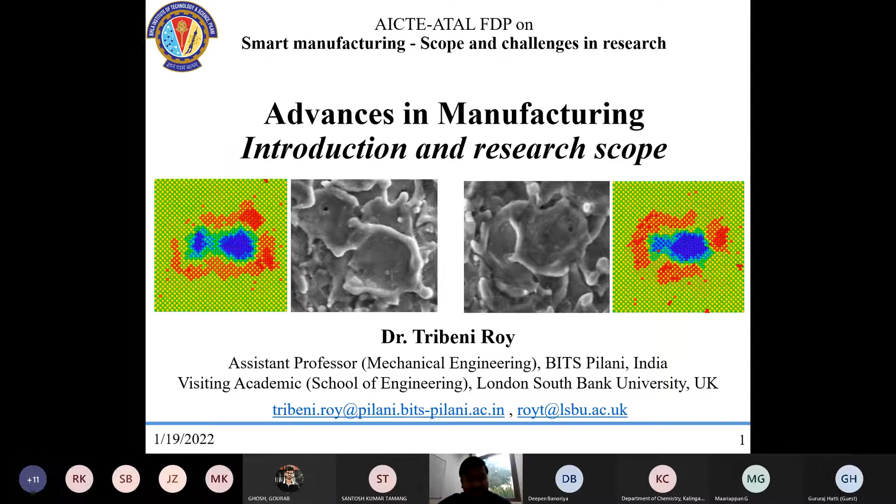Now moving on to today's first topic, that is advances in manufacturing. So my talk overview would be a basic introduction about this, then the evolution of advanced machining processes, though I would not go deep into each and every process, just an overview, and then micro nano machining, again in very brief, so that we do not spend much time on whatever is already available in the literature.

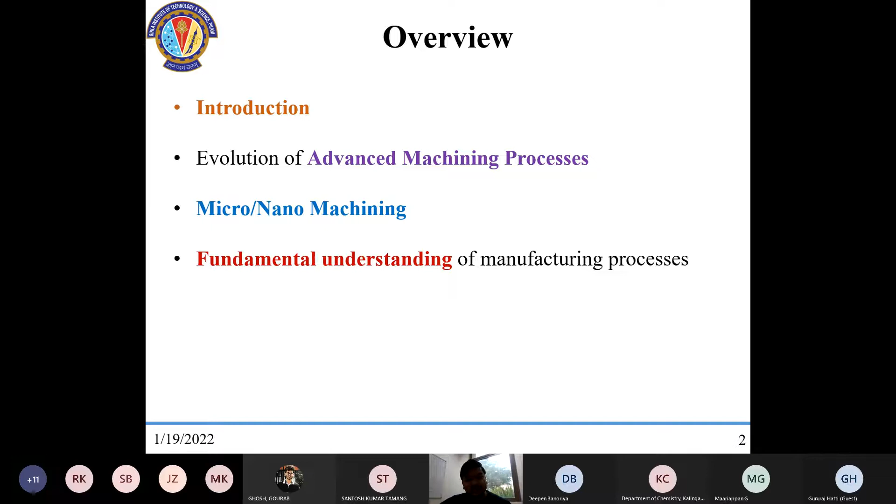Then something I want to introduce, so that if I'm talking about what are the research scopes currently in manufacturing, understanding the basics of the evolving manufacturing processes, in particular material removal processes, why is it important and how can it help researchers who want to move or start their career in this area, what are the things they can expect.

Currently, one of the works that we have done using an open source molecular dynamics simulation is on nanopolishing, which I will give a very brief overview of, and some other areas our group also explores apart from manufacturing, what are the things we generally explore.

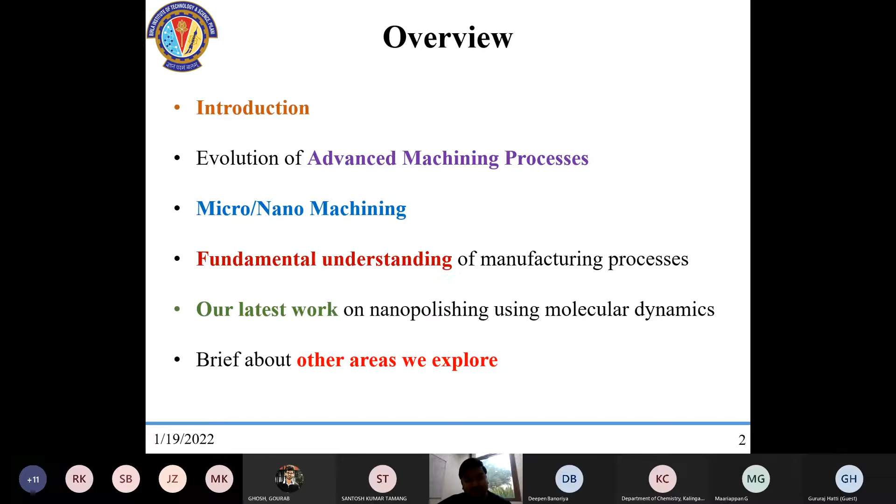Now, moving on, when I talk about advances in manufacturing, I want to know from the participants. If I say that my manufacturing advances, or advances in material removal processes keep on advancing, what is the final stage? When I say okay, I have done what is best in any material removal process, can anyone tell me what would be the minimum amount of material removal which we have control over? What can be the minimum amount of material that can be removed so that we can say we have reached the end point of manufacturing? Anyone from the audience?

So rapid prototyping, sir, or additive manufacturing? Additive manufacturing, okay, fine. So let me give you a basic idea of how material removal, material addition, and material forming and other stuff are different.

There is one particular area called top down process. When I say top down, I start with the raw material, I start removing material, and I end up with the final product. That is top down, which is material removal. When I say bottom up, I start doing a layer by layer deposition, starting from bottom and reaching the entire product. So that is bottom up, where rapid prototyping, 3D printing, additive manufacturing fall. Apart from that, you have physical vapor deposition, chemical vapor deposition, and a lot of other stuff.

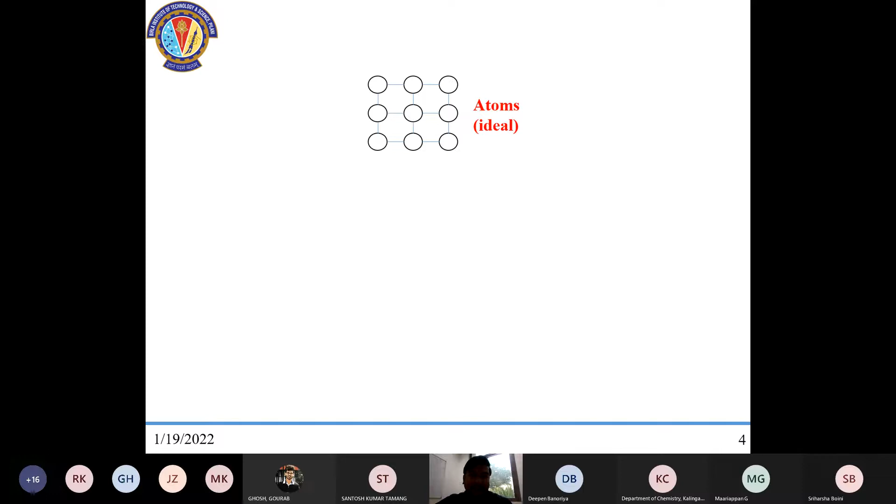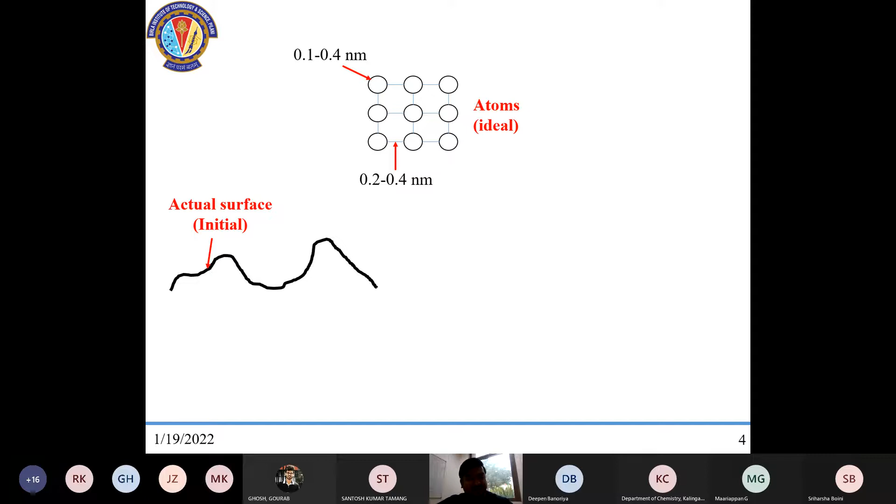This is just showing the dimensions of an atom and the distance between atoms and the average dimension. This is an ideal case. Your actual surface would always be like this, you have some waviness, you have some roughness. These are very basic terminologies we generally study. Now this surface may look like this.

Our goal in the material removal process is to make sure that whatever the requirement from the designer is — say for example manufacturing a 40mm shaft — we need to manufacture it to 40mm, but depending on the type of machining process you are utilizing, you may have some variation, which we call tolerance, generally provided as 40 plus minus 0.3 millimeter. Now, as you keep moving down, removing lower amounts of material, you are having much more control. Now, let me just open up the pointer.

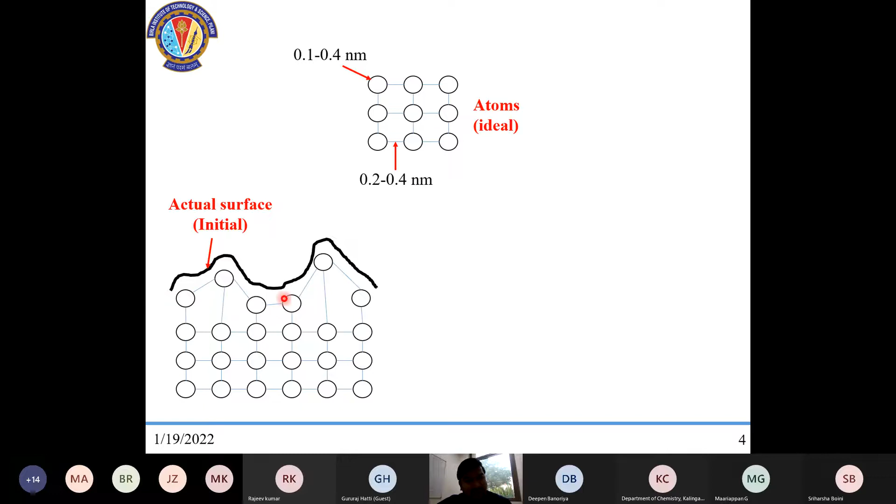If you look at it, say for example I want a very smooth, atomically flat surface. What I need to do is remove this atom, and these 4-5 atoms, such that I am getting an atomically flat surface. So if you have control, or you are developing a process where you have control on the number of atoms you are removing for each cutting or each pass, you are able to generate an atomically flat surface.

This is something which we can call ideal. It may be difficult in the long run to remove only a single atom. However, if we can remove clusters of atoms at locations which we require, that is also very close to ideal. So that is what advances in manufacturing, or particularly material removal, is all about.

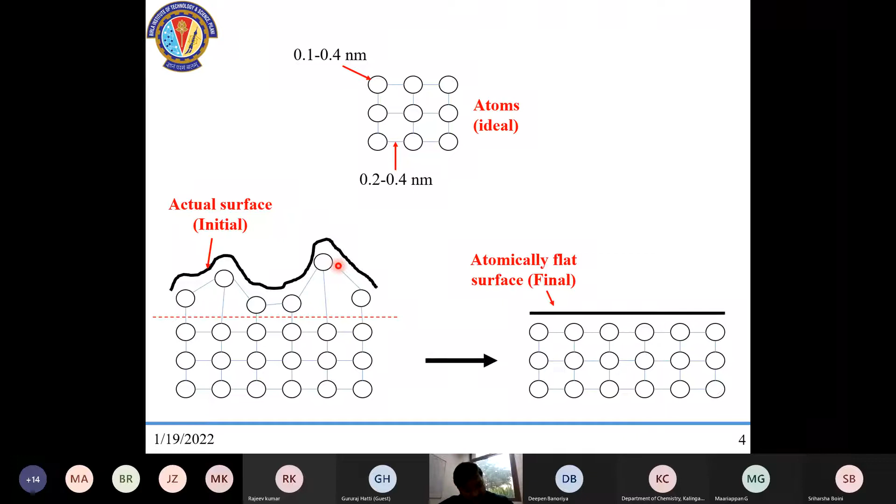Now this is just a simple example of how far manufacturing has progressed. We are still evolving. It's not that we have reached a point and there is something where we are stopping here. No, we are still moving ahead.

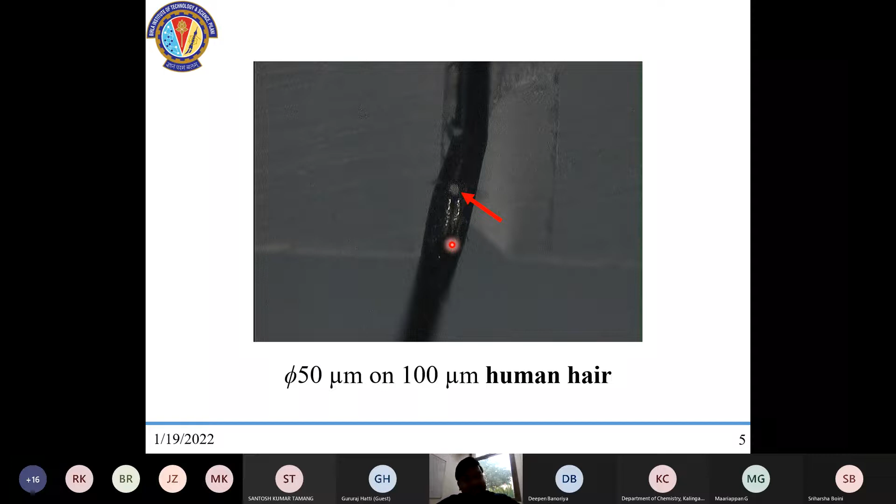Then this is an SS wafer, stainless steel wafer, and you can see it's formed a mirror image. This has been done using something called nano finishing or nano polishing process. There are multiple processes available. So you can clearly see that it is more like a metallic mirror, where you can see the image very clearly. So it's not a normal mirror, it's a metal polished or alloy polished surface, which gives a very high surface finish so that a mirror image of any object is possible.

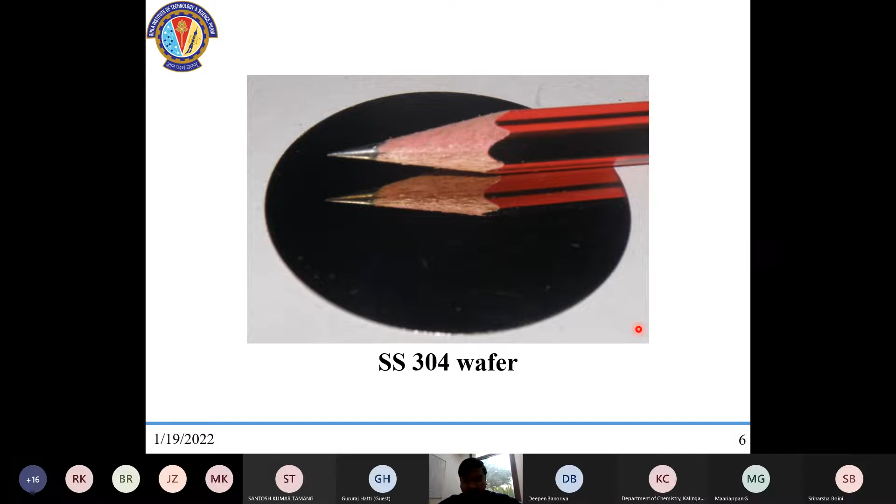So this is polishing. Next one, if you look at it, you see it resembles a tool post. It has a cutting tool, but the machined surface is like a mirror. If you talk about a turning operation or a facing operation, getting this sort of mirror finish on a metal or an alloy is next to impossible.

Now, looking at it, it still resembles a conventional lathe. However, there has been a lot of R&D going into it, and it has become something called ultra precision machining process. The cutting tool is not the conventional one, it is a single crystal diamond. Diamond, as we know, is one of the hardest materials known. Based on this concept, the workpiece can achieve an atomically flat or very high surface finish, close to 10 nanometers. So this is another area where progression has been made from conventional lathe to something called ultra precision diamond turning.

Probably one of the previous speakers, Dr. Rohit, is mostly involved in this. Now these are some of the areas where manufacturing advances has moved into.

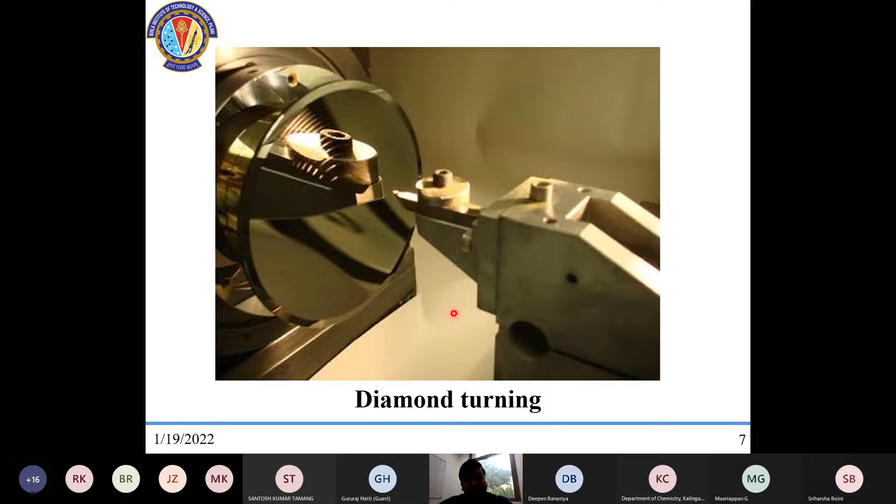Now the question is, why do we need to do this? Until and unless there is a need for certain things to be done, we don't require this. Now there have been a lot of applications based on which these sort of advances are being done.

For example, if you look at your cell phones, the one that we were using 5 years back and the one that we are using now, the amount of memory, the amount of capacity, and the amount of functionality it has produced, and the miniaturization that has gone into it. That means all the components, the chips, everything is getting smaller day by day. This is only because manufacturing has advanced to such an extreme level.

Apart from that, I'm just showing some basic day-to-day examples where manufacturing plays a key role. For example, this pavement, your shoes, this pen, they all have some sort of manufacturing excellence due to which we are able to use them in our day-to-day life.

Now, not only day-to-day life, there are also some advanced applications such as super hydrophobic surfaces. Imagine there is high rainfall in your area and you're driving your car. Now suddenly your wiper is not working. So if your glasses are super hydrophobic, indicating that whatever droplet or rainfall is falling onto it gets repelled automatically.

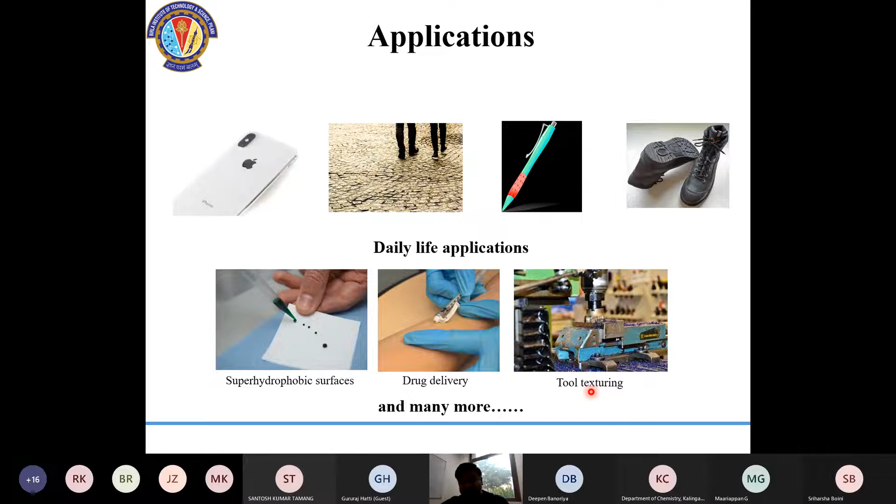Now, evolution of advanced machining processes. What I've explained mostly in the introduction is how it has evolved, and I've said it's because of applications. Now the question is, was it required? Can't we do this with the conventional processes that we have?

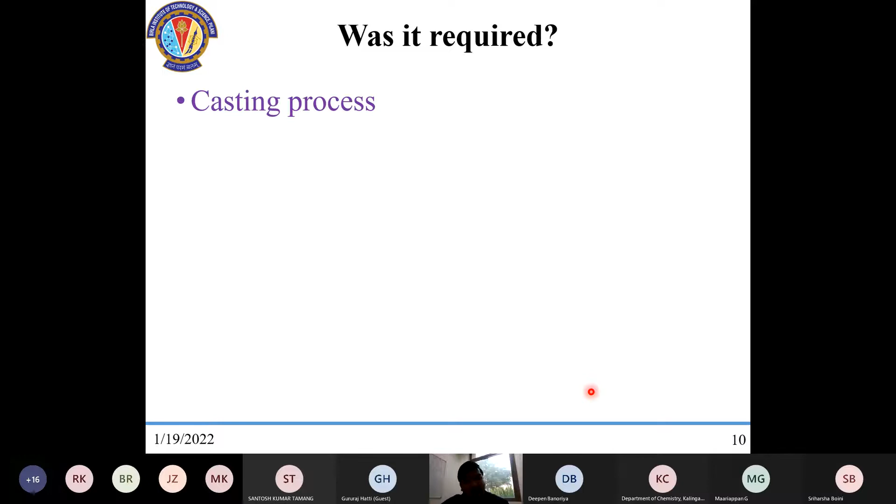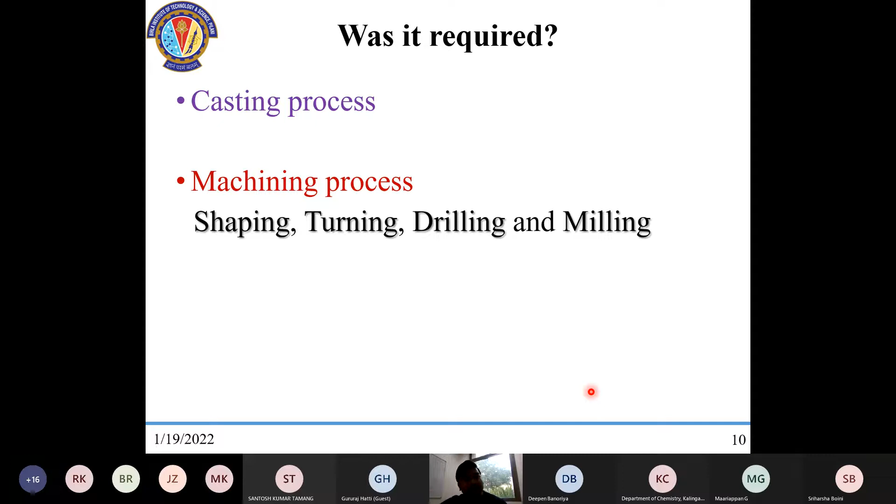Like, we already have a casting process, which is conventionally used across all large scale production. A machining process where we remove material and get the desired shape and size based on shaping, turning, drilling and milling, which we generally have in all workshops across the world. We have a forming process and a welding process. So the question is, isn't this enough, that we need to go for advanced machining processes? What were the limitations based on which we had to adopt alternate forms of processes different from whatever is shown in this slide?

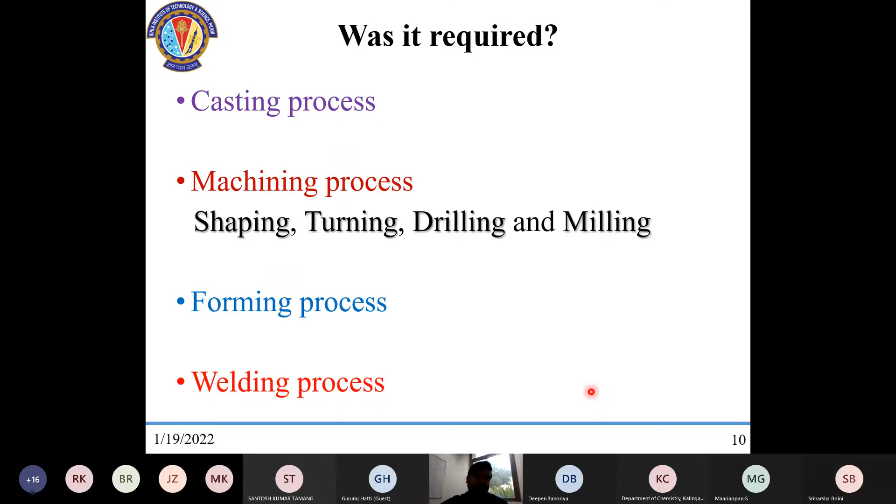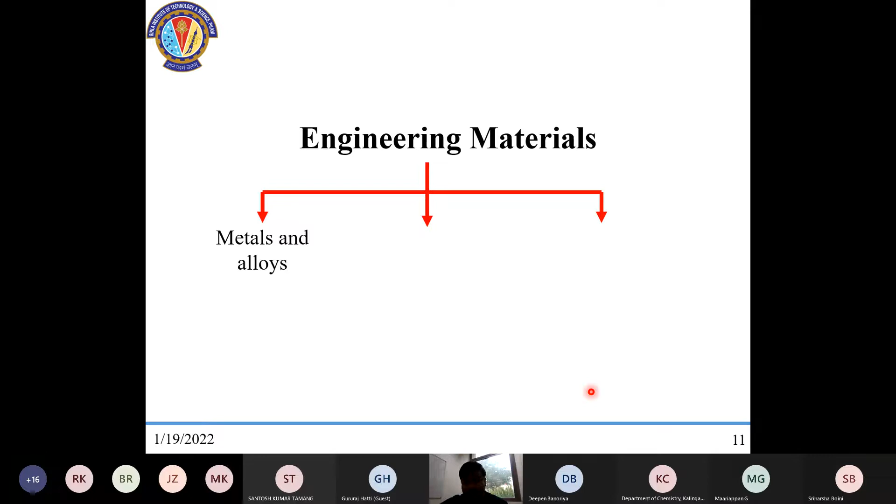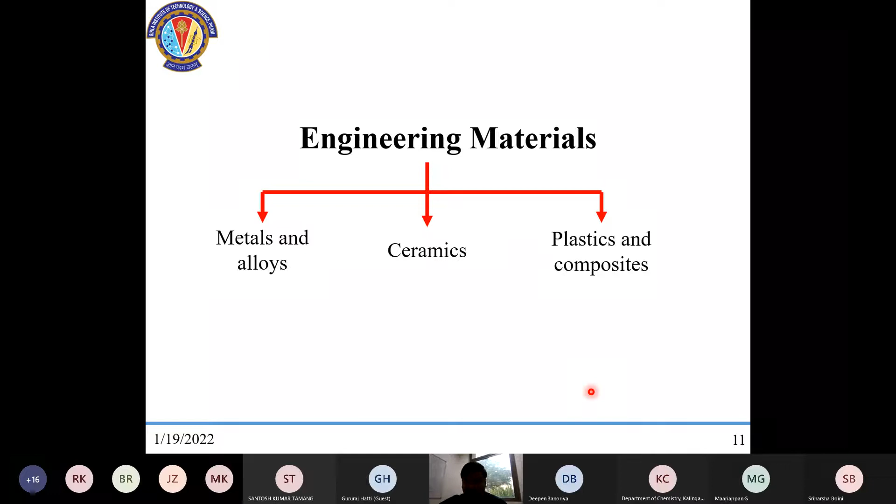Now comes the type of engineering materials. I've given very shortly three verticals: metals and alloys, ceramics, plastics and composites - and there are many others. You have metal matrix composites, and recently the evolution of high entropy alloys. So a lot of materials become difficult based on the type of properties they have. Using conventional machining processes for cutting or removing material becomes difficult because of the superior properties of this newly growing area of material science.

Now, always remember, it's not only the machining process that is being evolved. Day in, day out, a large number of materials are also being fabricated in the lab or going into commercial production. Shaping those newer materials for particular applications is equally important - that's one area where material science researchers are currently working. Once the material is proven, we need to make sure how we can shape it for use in a particular application.

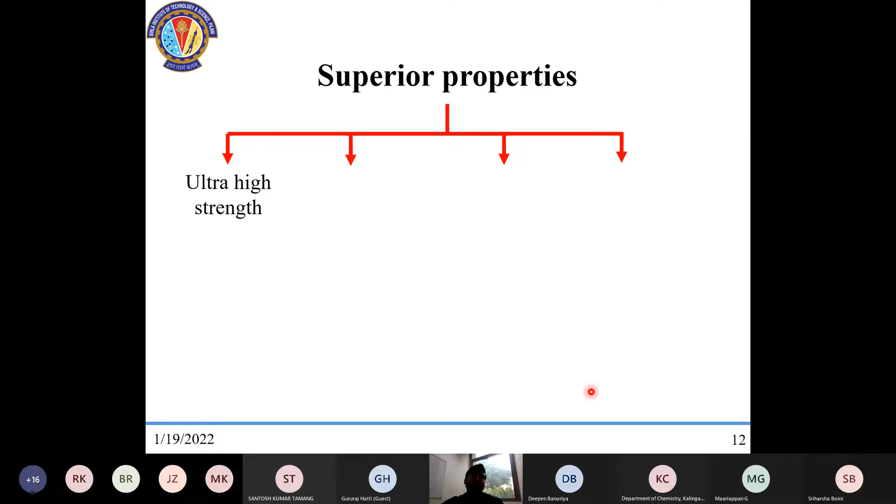Now, I have divided this into 4 verticals. Ultra high strength - if you look at some recently developed materials, one key area would be ultra high strength, high hardness, very difficult to scratch, high temperature resistance, and difficult to machine materials. Now, one key factor of conventional machining process - for example, turning operation - is the hardness difference between a cutting tool and the workpiece.

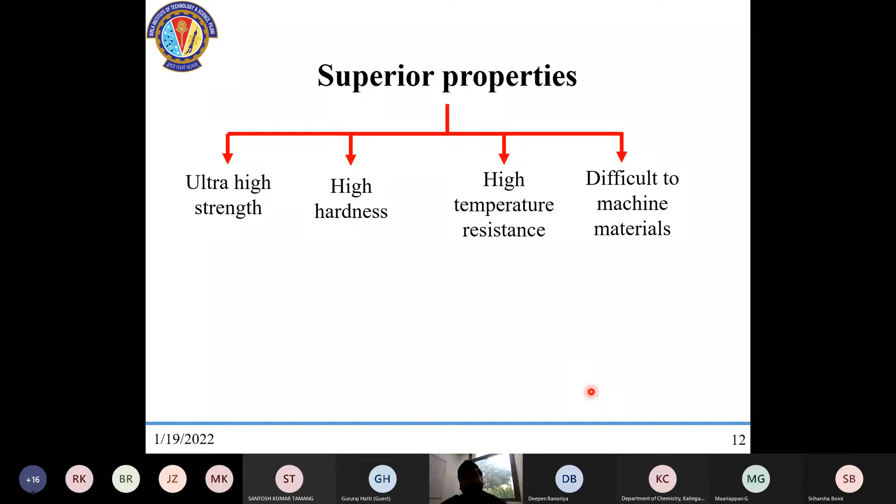If you talk about copper or aluminium, it's very easy to machine using a simple turning operation. Now, once I start increasing the hardness of the workpiece, there is high tool wear - I think you all must agree to this. Once the workpiece material hardness starts increasing and becomes very close to or even more than the tool material hardness, machining becomes difficult and higher tool wear is possible.

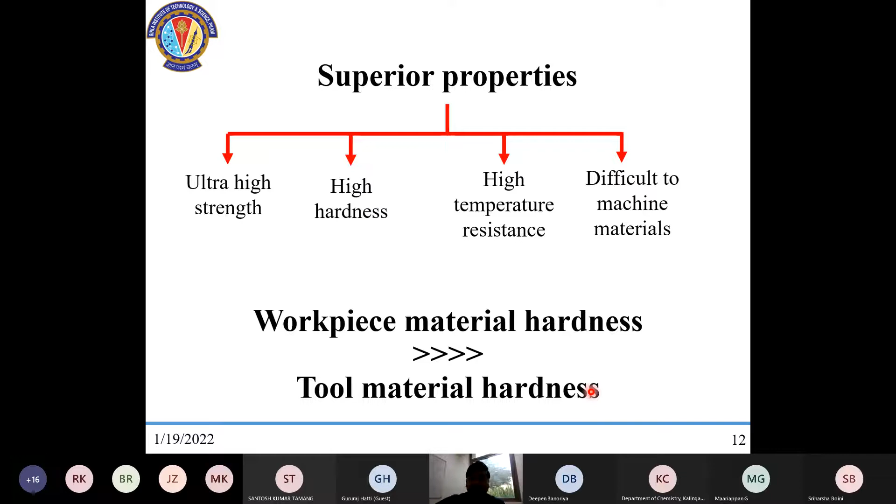So due to these reasons - superior properties of materials, the narrowing difference in hardness between workpiece and tool material, and certain other product requirements like complex shapes - it is not always possible to use conventional processes such as casting, forming, welding and machining to develop complex shapes as required by the designer. Machining in inaccessible areas is another issue - mostly using a cutting tool, and if using CNC to some extent, we have 4 axis or 5 axis milling, drilling, turning. Still, it becomes difficult sometimes to machine inaccessible areas with control over the amount of material to be removed.

Stringent tolerances: once production scales up and the number of defectives in an industry needs to reduce, as we move towards Six Sigma processes, defective items have to be minimized. Also, because the market is so competitive, tolerances have to be very stringent, meaning we cannot allow the deviation from the basic dimension to be very high. So being more accurate and precise with stringent tolerances becomes difficult using simple turning or milling operations.

The reason is the cutting tool has its own signatures, like the nose radius and other things. Now, if we do not control the amount of material removal, we are not able to manufacture goods with stringent tolerances in terms of accuracy and precision.

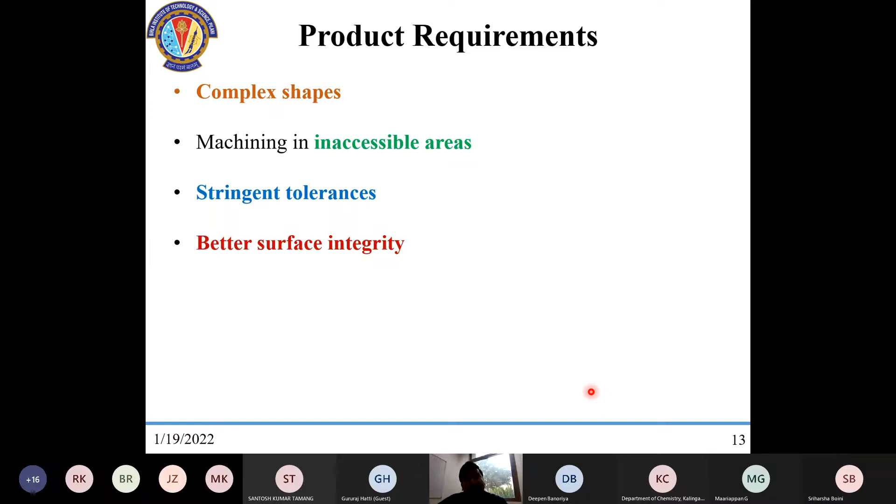Better surface integrity: even if we develop materials using a conventional process, we have to make sure there are no voids, cracks, or subsurface damages, and that it has better surface integrity, which becomes difficult using conventional processes. High surface finish: even when using conventional processes like welding for joining, we still need to add another post-processing operation to get a high surface finish.

The reason metal additive manufacturing research is still not attaining a proper level of acceptance is because with every metal 3D printing, we need post-processing to remove excess material or to get a better surface finish. Directly achieving a high surface finish using metal 3D printing may be quite difficult. So this is another area where, due to product requirements, it becomes difficult to adopt certain manufacturing processes.

High material removal and miniaturization: when I say miniaturization, I mean fabricating micro products, or having a large sample size but needing to create micro channels, micro dimples, or material removal in the micro range. When I say micro, I mean anything less than 1 millimeter, starting from 1 micrometer to 999 micrometers.

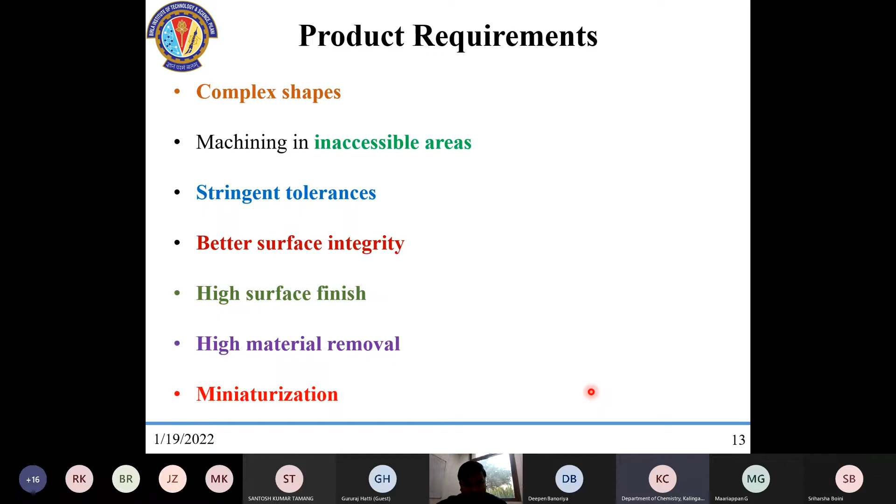Now, if I say I need to do nano machining or nano fabrication, chip removal or the amount of material removal should be less than 1 micrometer, so that it can be judged as nano machining or micro machining, depending on the chip removal and the type of product required. Based on all these things we've studied, we can say whether the evolution of advanced machining processes is required.

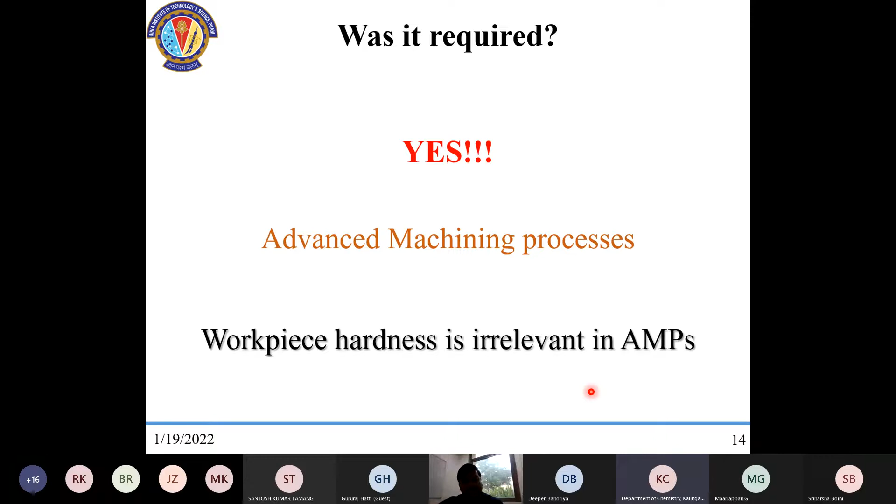Yes, it is required. In advanced machining processes, workpiece hardness is irrelevant. Irrespective of very high strength or high hardness material, advanced machining processes are able to machine to the required shape and size.

Now let us briefly discuss the different advanced machining processes. There are different classifications. If you go through textbooks, you can find innumerable ways in which AMPs are classified. However, I would simply state them based on the different types of energies used, so that we can classify them.

First is mechanical, which is basically abrasion or erosion type material removal, using abrasive or any type of energy which removes material by erosion or abrasion. Second is thermoelectric, mostly by melting and vaporization, also sometimes called ablation. Third is chemical, mostly by etching—on a surface, if a particular acid or liquid reacts with the material to remove or dissolve it, that is called etching.

Under these three verticals, for mechanical, we have abrasive jet machining, where a stream of abrasives is used. Abrasives can take many forms—diamond abrasives, alumina, or various others. Using that abrasive jet, you can machine high strength material. Now, as I discuss AMPs, these processes will also have advantages over conventional processes, as well as some limitations.

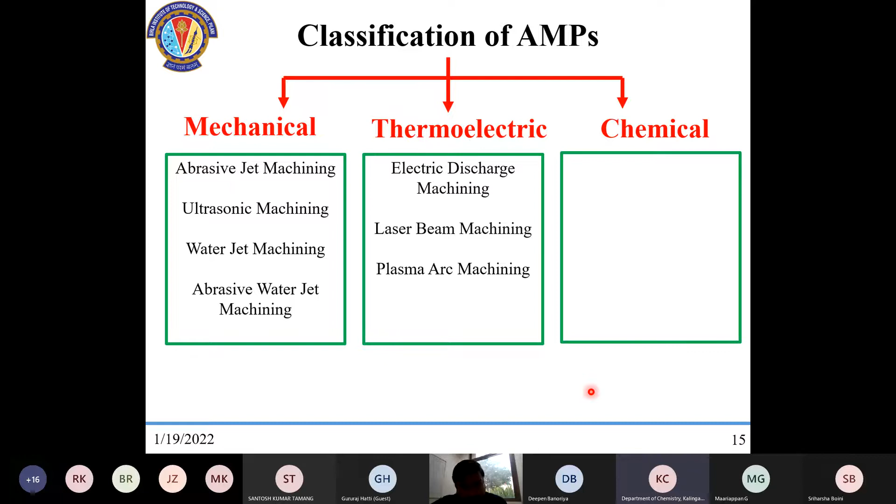Plasma arc machining, electron beam machining - these are high-end machining processes. The cost of developing the setup for electron beam would be very, very high, so these are available in very select institutes only.

Now moving on to the chemical classification of AMPs, you have chemical machining, directly etching, and electrochemical machining. Electrochemical means based on some electric field, you initiate some sort of etching or dissolution so that material is removed. Obviously, as I said, all these processes have their merits and advantages, but also have some limitations.

So simultaneously, when these AMPs were being developed, there was also a field where people started taking advantage of two or more of these processes, coming up with something called a hybrid machining process.

For example, abrasive water jet is a mixture of abrasive and water jet, which becomes a hybrid taking advantage of water jet, where no heat affected zone is there, and abrasive, where you can have material removal. So this can have higher material removal without any heat affected zone.

Again, EDM and ECM mixture - people are also using something called ECDM, electrochemical discharge machining, taking the advantages of EDM and ECM to make a new hybrid machining. So there are multiple hybrid systems being developed.

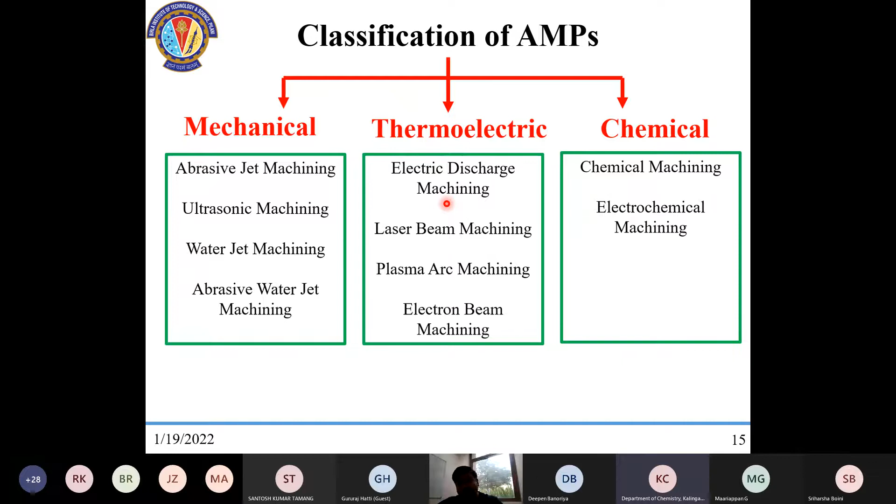Now I will not go deep into it. After this, I would move straight to what is called miniaturization or micro-nano machining. Whenever we say micro-nano machining, the difference between conventional macro and micro-nano is in the chip removal. Micro chip removal is mostly in dimensions of micrometers, somewhere between 1 micrometer to 999 micrometers. If I talk about nano machining, anything removed at a scale of less than 1 micrometer qualifies for nano machining.

Now what if I reduce the size of the tool and the workpiece and qualify it as micro machining, and then again reduce the size of the tool, workpiece, and entire setup and call it nano machining? I just want to know your opinion: does simply reducing the size of the components, tool, workpiece and other stuff from macro to micro to nano qualify as micro machining and nano machining? Anyone from the audience can speak up.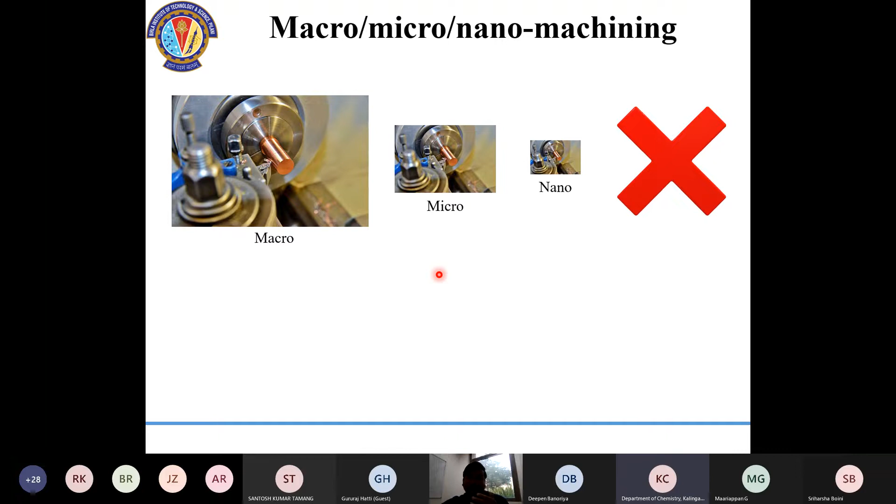Now what happens is, if you look at the grain structure, say I'm just showing two examples. Suppose, in a macro turning operation, this is the amount of material you are removing. So what happens? There are multiple grain boundaries, multiple grains involved, which does not take into account the individual defects or the strength of the individual grain.

So if you talk about individual grains, they are strong. However, when you take the grain boundaries and all other defects into the picture, this becomes much weaker. That is why when we are using conventional macro machining or macro turning, it is very easy, and the amount of stresses developed or the cutting forces, if you measure, those are very less as compared to the ideal stress or strength that is required.

So for ideal strength, you can find out the individual grain strength, and then dividing it by the amount of force that is required, you can simply find out what is the amount of stress required. Now in micro machining, say we are removing fewer number of atoms.

Now what happens is, as you narrow down or reduce the amount of material to remove, this individual grain strength comes into the picture, and the amount of force that is required to remove this small amount of material becomes high.

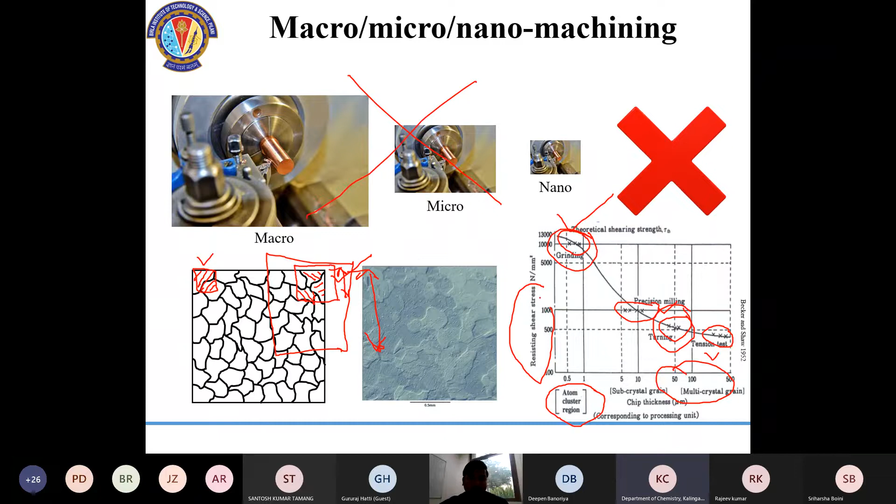So size effect is very important, and this particular thing I showed earlier is actually wrong - it all depends on the size effect. Hope this is clear to all.

Now, what I forgot to tell is that whatever advanced machining processes I explained, all of them can be converted into micro machining as well. For example, you have EDM, which is a very large machine that can remove a large amount of material. It can also come into the micro domain where you have micro EDM. Now researchers are also trying to get into nano EDM where the amount of material is very low.

Similarly, ECM has a micro ECM version. Laser has laser micro machining. Apart from that, ultrasonic machining has ultrasonic micro machining. So all the conventional advanced machining processes I have explained are also available or being developed into their own micro machining category. So it's not just that we do advanced machining, we're also doing advanced machining in the area of micro machining.

Now this particular slide, I wanted to show you the different capabilities. When I started this, someone gave a topic of rapid prototyping, and I talked about top-down and bottom-up approaches. If you look at this on the left, these are all micro machined, with dimensions in micrometers. If you look at this scale, it's somewhere around 100 micrometers, so this dimension would be somewhere around 30 or 40. All these small holes are maybe 30 or 40 micrometers.

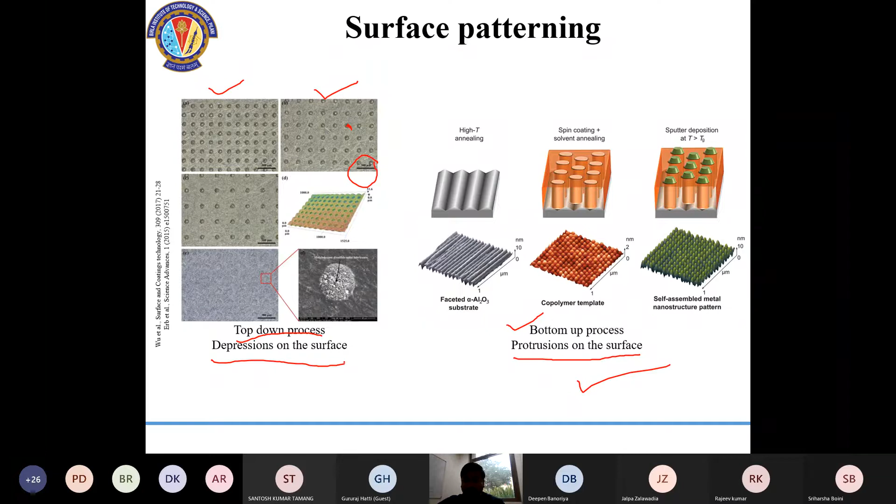Now I would like to move on to the fundamental understanding. As I have simply explained the size effect, if you remove a lower amount of material, you have to use a higher amount of cutting forces.

The reason is lower number of defects. Now, these particular things, say you have a single crystal or a polycrystal. Generally we use polycrystals. Polycrystalline materials have BCC, FCC, HCP structures. What happens to those if you're going for nano or micro machining - is it through normal abrasion? What happens to the grain structure?

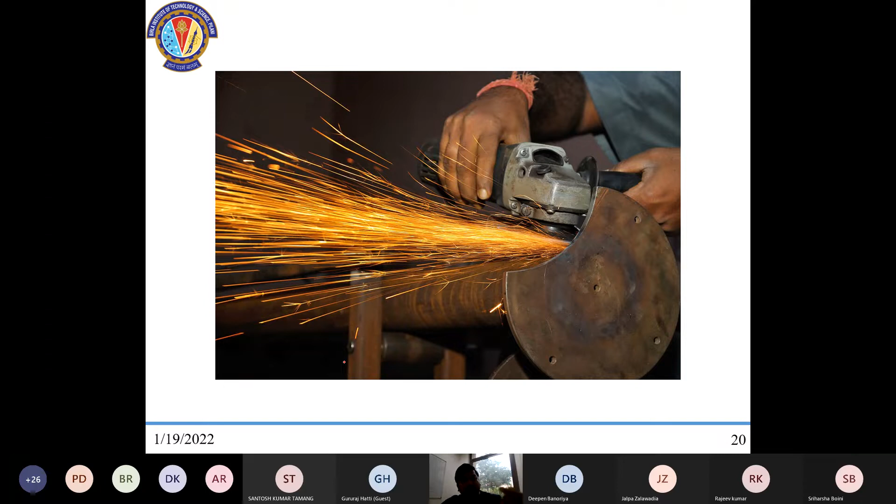For example, in a simple grinding operation, you know that abrasives are removing material. But what happens - do the abrasives dislodge material, or do they cause adhesive wear? These examples are taken from some literature. If you look at it, these abrasives first create a small indent, and then they start removing material in the form of chip. So this is what we know about grinding or any abrasive-based material removal process.

Similarly here, which is a more advanced finishing process, I have taken this from literature. Now what it does is you have an axial force, a radial force, but we don't exactly know what happens to the material. If the material has multiple grains and we try to remove material using grinding or abrasive-based removal, what happens if the abrasive falls inside a grain, or between grain boundaries, or across multiple grains? Understanding those aspects is very important, because if you are not aware of what is happening in the material, you cannot develop your understanding and further improve the process.

Why understanding micro and nano machining is important is because once you understand the process, only then can you improve it. If you do not know the physics, how would you improve it? Simply putting in X and Y and doing hit and trial experimental trials is very difficult.

Always remember, as I said, cutting forces are high in micro and nano machining. Therefore, the energy used per amount of material removed is very high. So to remove unit material, you consume a higher amount of energy - it can be electrical energy or any form of energy, which incurs a cost. So simply doing hit and trial becomes meaningless if you are consuming such high energy. Once the physics is completely understood, then going for developing the process is highly recommended.

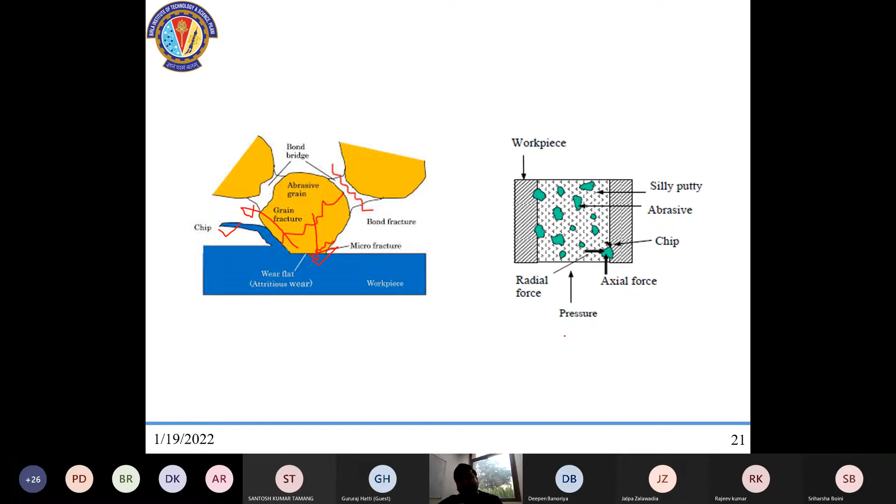Also, when doing research, it is very important that you understand the physics of what you are currently doing. With this, there is a separate area many researchers are moving into, called multi-scale modeling. Let me give a brief example. Most researchers use commercial software such as ANSYS, Abaqus, and COMSOL, which can optimize the process by simulation, giving you the cutting stresses, temperatures, and a lot of other data.

However, what it cannot do is show what happens in the material at such small scales. The reason is FEM particularly uses meshes which have a limited size. You cannot go beyond a particular size, and the material considered in FEM is a continuum - you cannot divide it into individual grains. So that is one of the demerits.

Now there is a scale at which this modeling phenomenon occurs. Across scales, the system size is in meters and the simulated period is in time scale. At the very left end, you see it is mostly at the angstrom level or nanometric level, where you use ab initio methods and quantum mechanics. This is mostly done by computational physicists and computational chemists, but since everything is now multidisciplinary and interdisciplinary, many researchers are also moving into this area. In ab initio, we use only a very few number of atoms to understand the very fundamental level of physics - valence bands and other things.

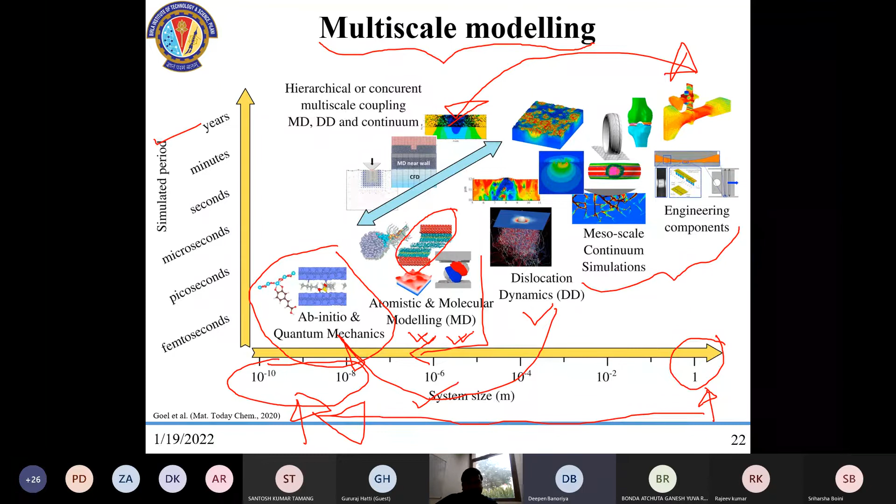Recently we were trying to understand nano polishing—in simple terms, if I have a material and an abrasive, how does the abrasive remove the material, and what happens to the grain structure? How is it distorted, is some amorphous structure generated, or if the structure is FCC, how does it differ?

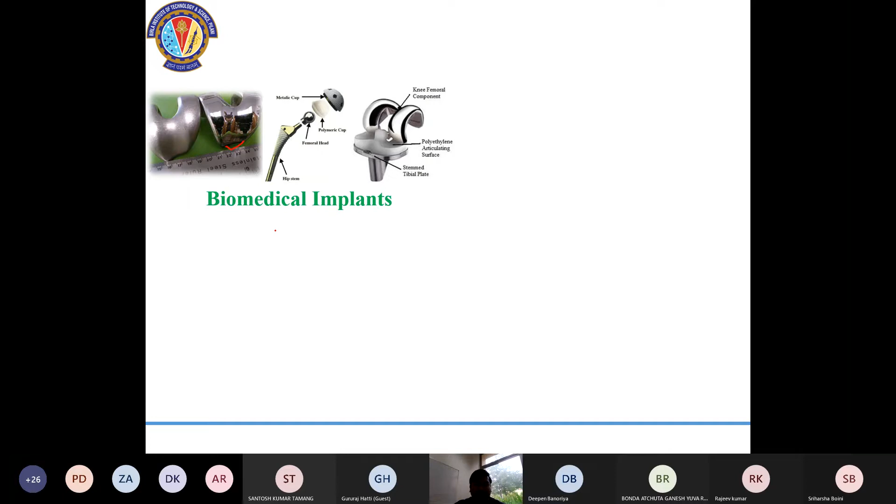Where is it used? If we don't have an application, there's no point doing it. If you look at biomedical implants, a high amount of surface finish or polished surface is required—because without it, when the surface rubs against another surface, the patient would feel discomfort. You also have high-speed rotational components, ball bearings, optical lenses and mirrors. So nanopolishing is a very important process in today's world, where very high precision as well as very high surface finish is required.

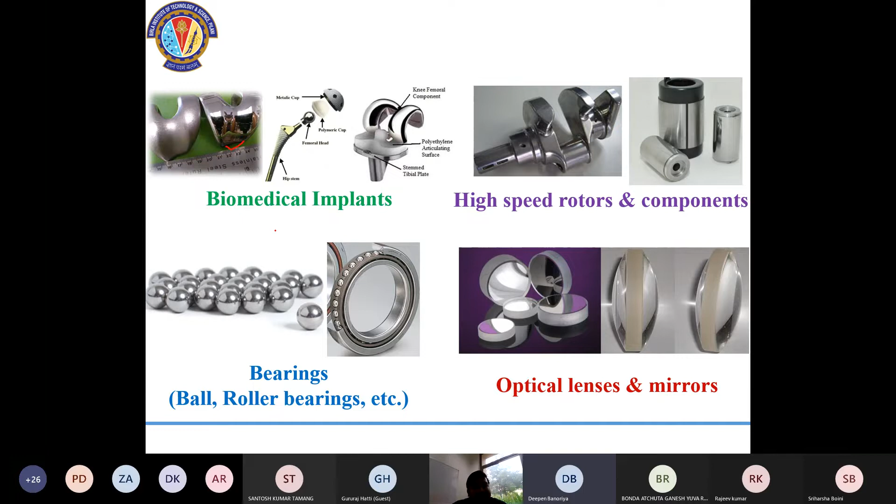To understand this, we started exploring MD simulations to understand how an abrasive and a particular polycrystalline material interact. The abrasive first does a small indent in the vertical downward direction, which is the depth of cut, and then it starts moving horizontally and removing some amount of material.

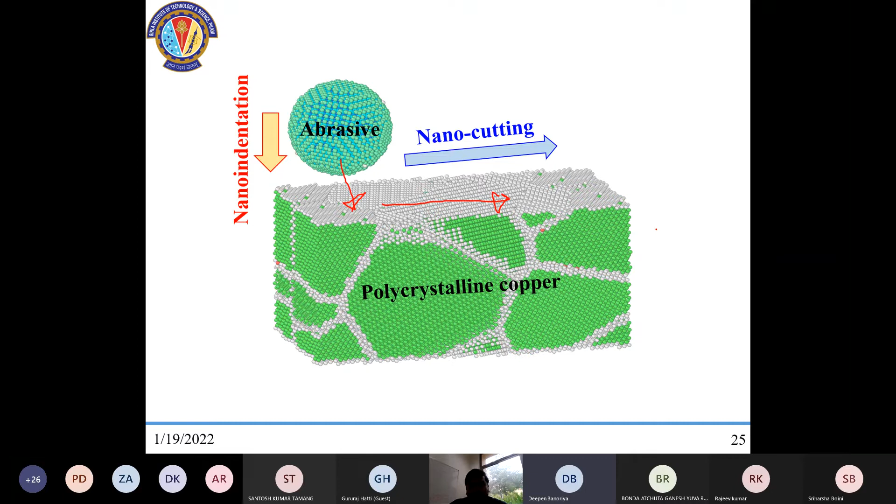Going deeper, the initial indentation was 10 angstrom, and the dimension was somewhere about 120 angstrom—that means 12 nanometer, maybe 12 or 15 nanometer, I don't remember exactly. This is the kind of scale where MD simulation operates; you cannot go much higher, because the computational cost and power increase substantially and it takes much longer to get results. So we do 10 angstrom depth of indentation—meaning the abrasive moves 10 angstrom downward.

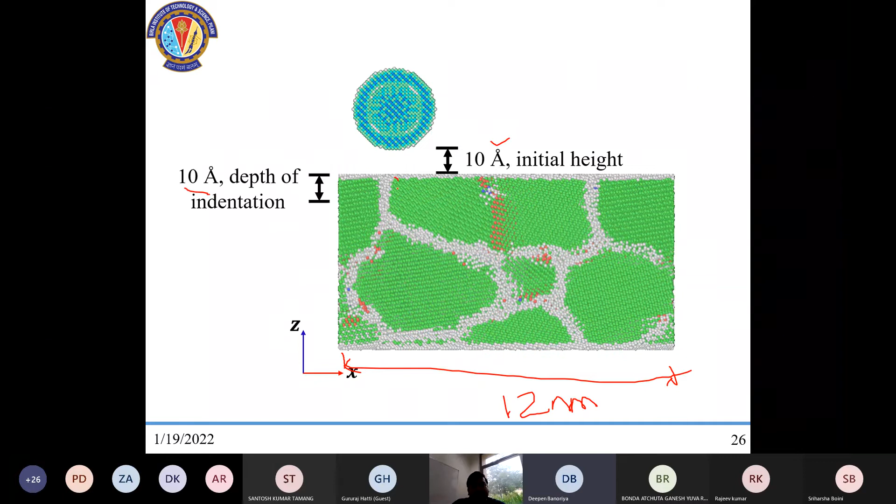Here's a simple video where we used something called LAMMPS. LAMMPS is an open source MD simulation software which allows you to explore fundamental physical phenomena for any process. I'm showing this because we work in the field of manufacturing or material removal, but if you're interested in any other field, you can explore it too—you just need to understand how to use it, the physics involved, and what you need to know to start working on it.

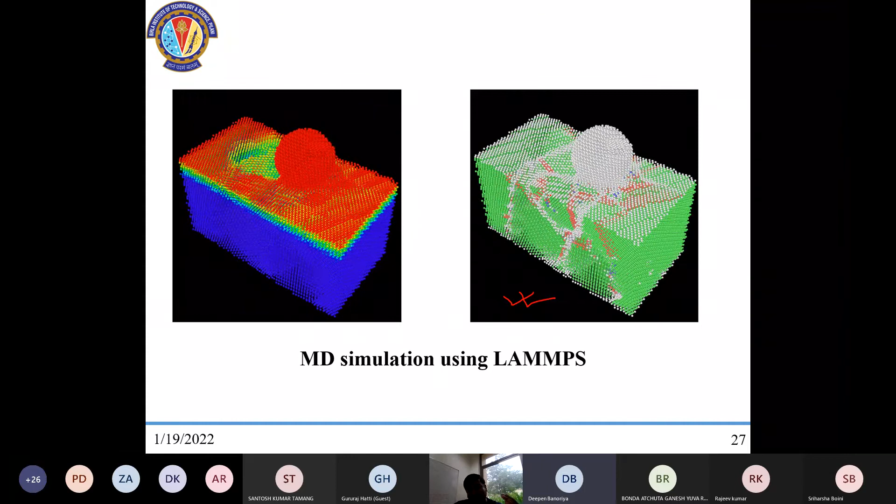Looking at this, the abrasive creates an indent and material is being removed. On the right side, the green color shows the FCC structure, and the grain boundaries are amorphous. Once it starts moving in, the amorphous atoms are also being taken away along with the abrasive—notice the red and white atoms are also being removed, showing a shift in the amorphous atoms being removed. This was the initial state where indentation was completed; now as it moves, it's taking atoms from this particular grain along with it.

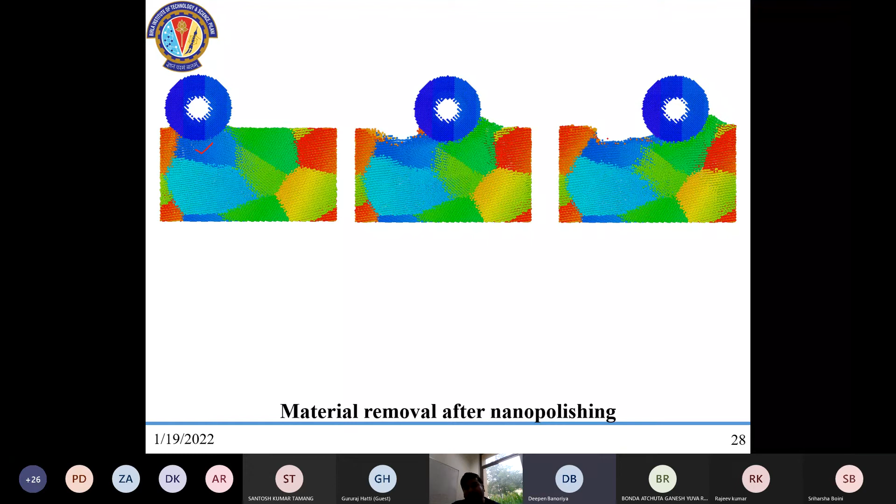And finally, there is material that is removed from here and taken up. So if you look at this, there's a pile up here. In actual operations, this would be removed. So you can see how material is being taken up, and we can study the grain structure.

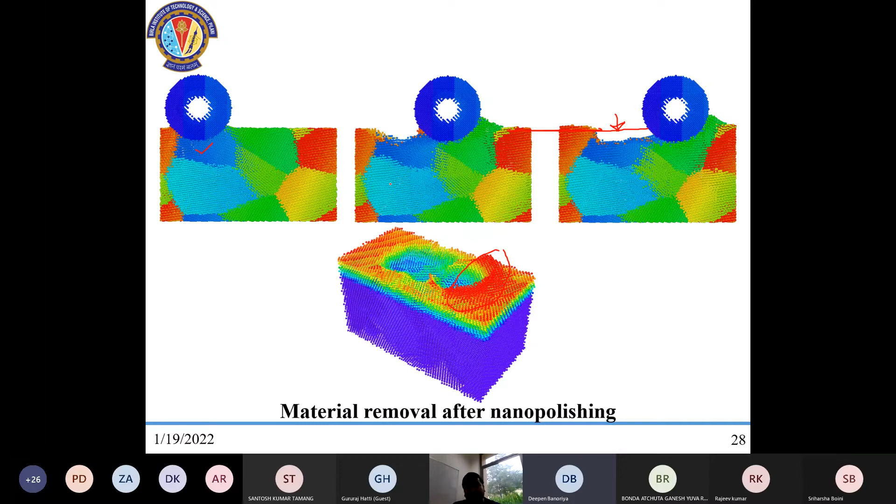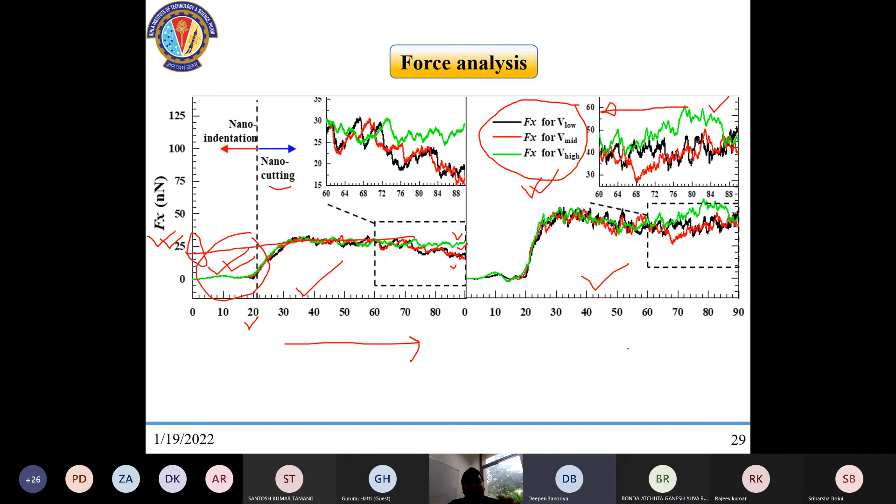Now, there are other aspects also we studied, about the dislocations and how they move, though I have not shown here. Other areas - so this was more about nano polishing. One of the areas we have just worked on, and we have just sent it to a journal. Other areas where we are still exploring, we have explored some and we are still exploring.

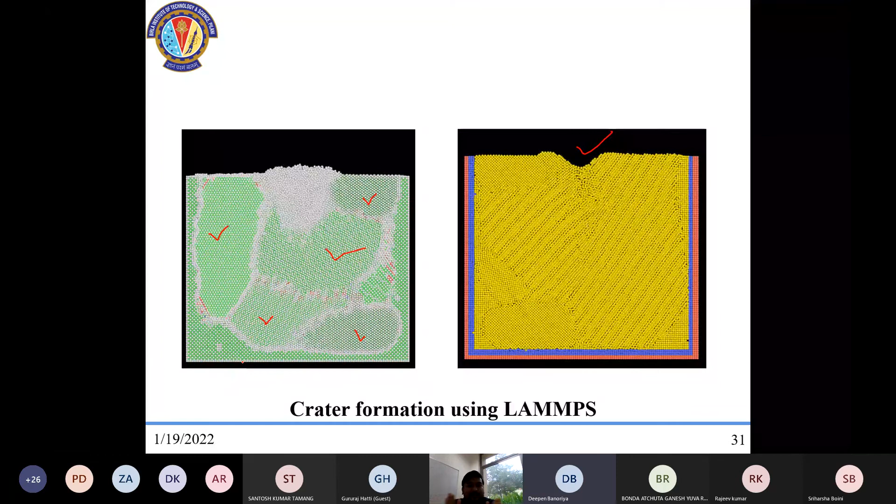Apart from that, we are also working in the area of energy storage, where we try to understand how batteries and supercapacitors behave, or if we have a particular combination of an electrolyte with an electrode, what is the mechanism of energy storage we use. So this is something we also explore as part of our work here at BITS Pilani.

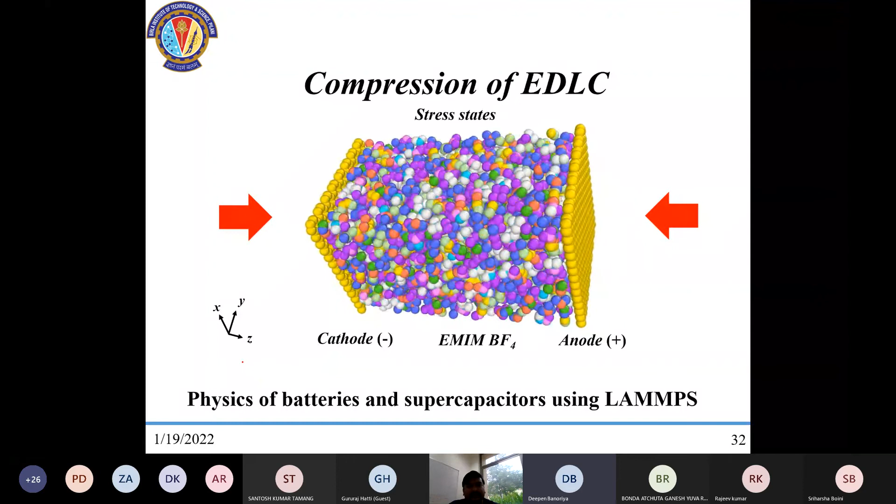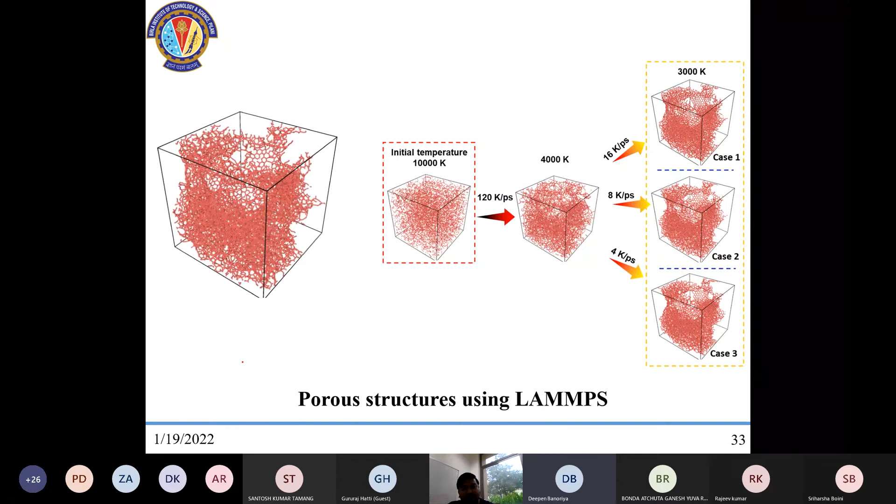And with this, probably I would like to end my talk here today, where I have tried to summarize the advances in manufacturing, as the title suggests, introduction along with the research scope, that fundamentally understanding any process.